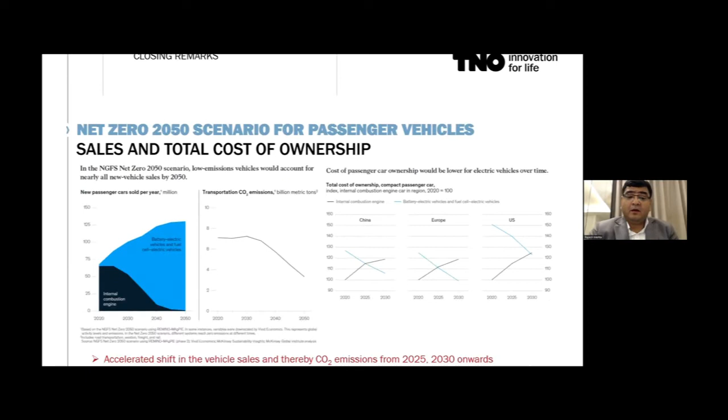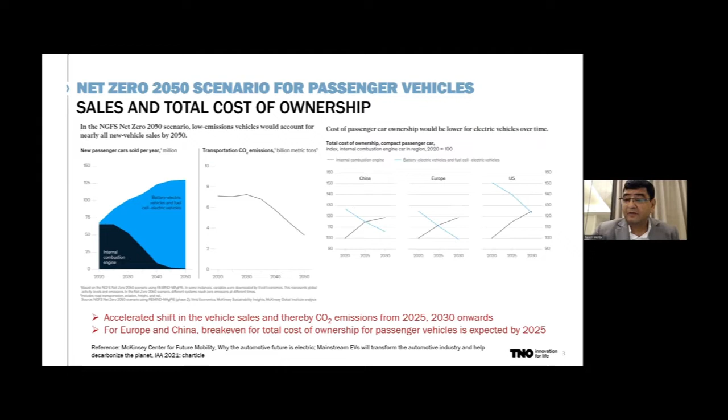Now, if you look at the net zero 2050 scenario for passenger vehicles, McKinsey gave a forecast that there is an accelerated shift in vehicle sales and thereby reduction in CO2 emissions from 2025 to 2030 onwards, shown by the sharper curve on the left side chart. For Europe and China, there will be a breakeven for the total cost of ownership for passenger vehicles coming up in the 2025 onwards timeframe for these two major economies, helping move towards the net zero scenario for the industry. The US will probably hit breakeven later, by around 2030.

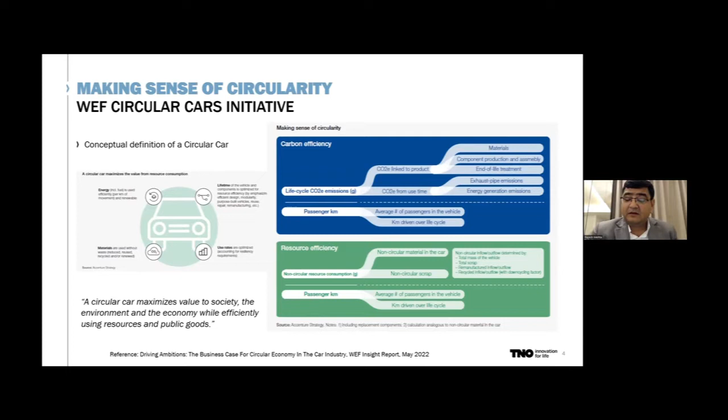Now, how do we make sense of circularity? The World Economic Forum developed a concept through its Circular Cars Initiative, defining a circular car as one which maximizes value to society, the environment and the economy, while efficiently using resources and public goods. This conceptual definition is based on four primary principles: energy, materials, lifetime, and use rates, optimized by maximizing carbon efficiency and resource efficiency throughout the product lifecycle.

This initiative also emphasizes how we can proceed at different levels of circularity. Currently, from an owner-use-and-dispose concept at level 0, the Circular Cars Initiative highlights moving to net positivity in the system, and by 2040 onwards, making a positive contribution to society. This entire transformation pathway is structured at four different levels: product decarbonization, material circularity, lifetime optimization, and utilization optimization, thereby enabling carbon efficiency and resource efficiency.

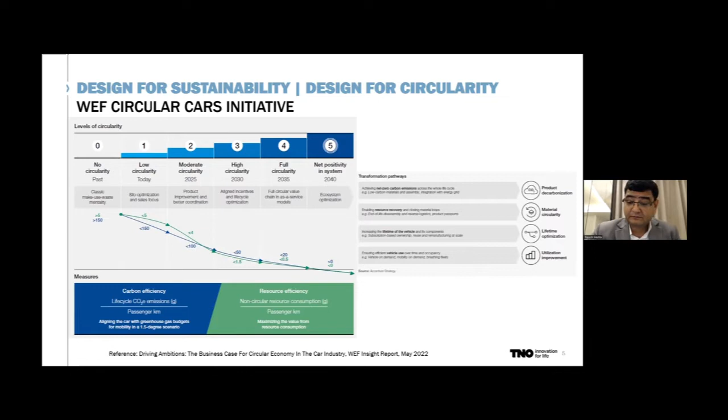This transformation pathway, as envisioned by the World Economic Forum, covers four different levels. The first is product decarbonization, with different examples proposed by the Circular Cars Initiative at levels 1 through 5. The second pathway is material circularity, with different concepts proposed here. The third, as I said, is lifetime optimization, and the fourth is utilization improvement.

All the different pathways finally converge at level 5, which is the development of a mobility ecosystem that makes a positive impact on the environment with net zero carbon emissions. So we are moving away from individual car-based transport to a mobility ecosystem at level 5. That's how the World Economic Forum's Circular Cars Initiative envisions the path forward for the industry.

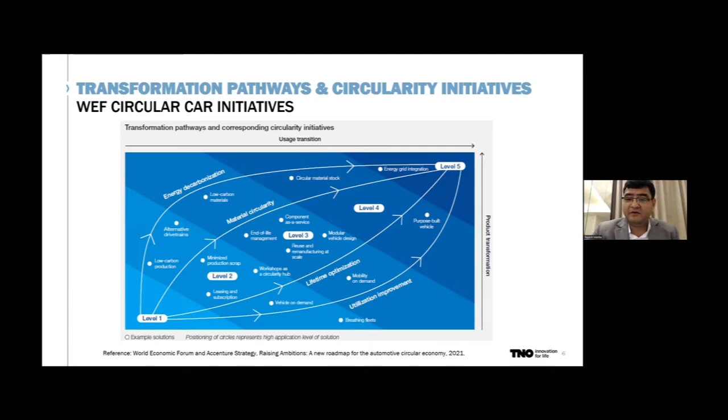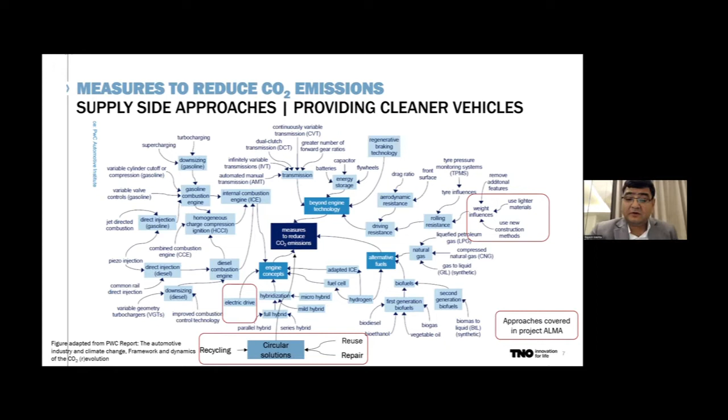Some of these approaches have been touched upon by our project ALMA, a Horizon 2020 program. We have explored weight reduction options, engine concepts moving from ICE, internal combustion engine, to battery electric vehicles with electric drive, and also incorporating concepts such as reuse, repair, and recycling to offer circular economy solutions in the product development phase.

Now, what does Project ALMA aim to achieve? The goal is to design, validate, and build a lightweight prototype, including the body in white, closures, and the modular platform systems. This prototype should fall within an acceptable range of the functional, safety, and manufacturing requirements of the OEMs.

The project is a collaborative effort among 9 partners, as mentioned here. CTAG and Ford are driving this program, and other partners are contributing to this overall effort. The program is a 3-year project with a total EU funding of 5.2 million euros.

Now, within this project, TNO developed a tool called BEVSIM, which is short for Battery Electric Vehicle Sustainability Impact Assessment Model. It's a web-based tool on Diamonds, TNO's proprietary platform, built on R Shiny programming suite, and has best-in-class databases on lifecycle impacts.

The tool offers users the ability to compare design alternatives. To make a significant impact on improving sustainability performance, you have to think through the design elements of a product. That's why the emphasis of this tool is to allow designers and engineers to compare alternatives early in the design cycle. It's designed for non-LCA experts, enabling early sustainability evaluations, faster LCA evaluations, and scenario evaluations, even for non-sustainability experts.

The tool is customizable. You can model a full car, a subsystem, or a part for lifecycle impact assessments, lifecycle costing, or circularity analysis of your material or products. And of course there is the possibility to include customer and user-specific data sets in this web-based tool.

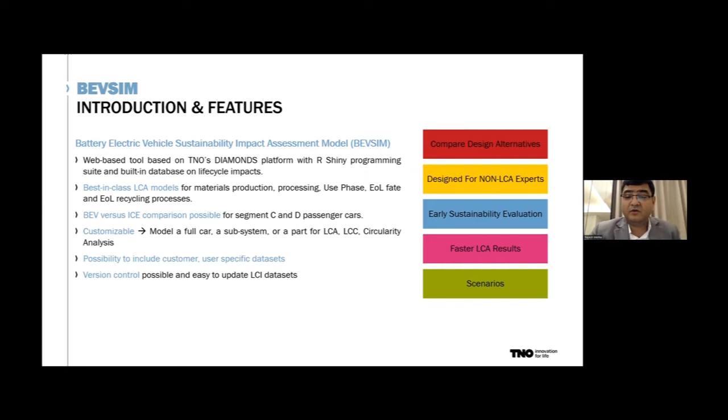To make sure sufficient confidentiality is maintained and version control aspects are taken care of, the tool handles this through the web-based initiative, where a user ID and password is provided, with separate organization-based or individual-based login credentials.

Now, why do we need another sustainability assessment tool? Here is the value proposition for the BEVSIM tool. As I said, it allows early screening of design alternatives in the research and development phase, offering significant savings in time and effort for performing LCA studies compared to full suite LCA software such as SimaPro or GaBi.

It offers consistency across LCA studies for automotive applications because your entire data set is available on a single platform. It's an application and sector-specific tool with a simpler design, focusing on key engineering and design elements, which at times get missed by LCA experts when moving from one sectoral LCA study to another. It also offers lower total cost of ownership compared to full suite LCA software that requires in-house LCA experts or services of LCA consulting companies.

Now, BEVSIM actually targets different user segments. At the organization level, you have automotive manufacturers, tier 1 or 2 suppliers, material manufacturers, service companies, and of course research institutes and universities who can utilize the services of BEVSIM.

The target user segments are automotive engineers, product developers, and product designers. Sustainability and LCA experts can also use this tool for doing LCA studies themselves, and academia and LCA consultants are also key users of this tool.

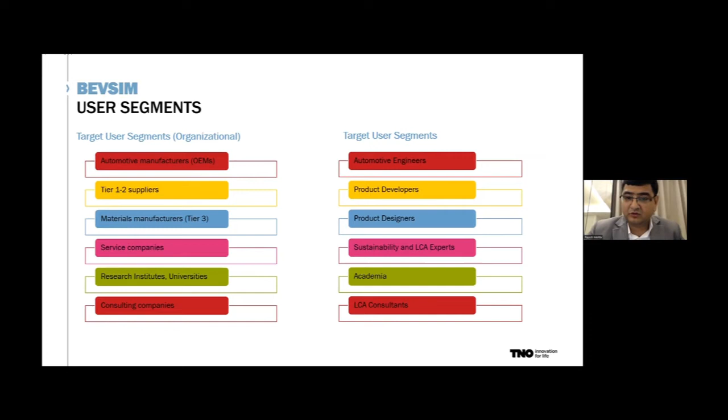Now, what are the capabilities of the tool? It's a single tool to do all three types of assessments: environmental through LCA, economic through life cycle costing, and circularity through circularity assessment. It allows measurement of impacts through lightweighting, comparing different design alternatives, or choice of materials.

It covers choice of subsystems, implications of the use phase, and the geography where your product is going to be used, be it in Europe, China, or India, and choice of different recycling options at the end of the vehicle life, as well as various futuristic scenarios such as grid mixes for 2050 or 2030 in different geographies.

Now, BEVSIM covers the entire life cycle phases of the automotive parts or the entire car, right from raw material production to processing and part production. Assembly operations, which are critical and often get missed in LCA studies, are well captured in this tool.

The use phase aspect of different cars: at present, we have passenger vehicles captured, but we plan to cover commercial vehicles also in the BEVSIM tool. Different end-of-life scenarios go beyond traditional incineration, landfill, and recycle options, all the way to capturing recycling options for plastics and composites, from mechanical to pyrolysis and solvolysis.

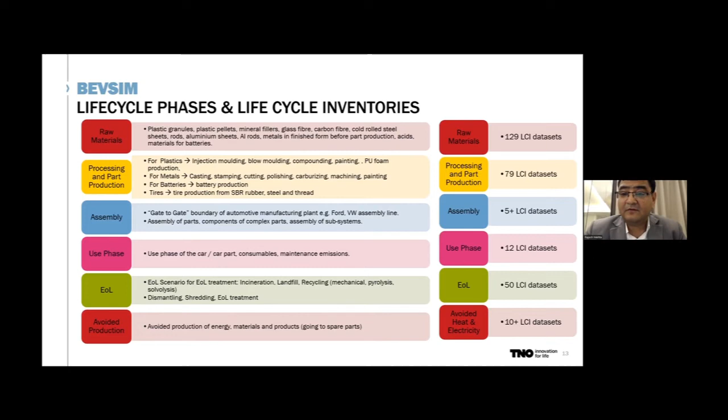An important aspect is dismantling, shredding, and end-of-life treatment options, which also often get missed in traditional LCA studies and remain a gap. The last one is the avoided production aspects that are well captured. On the right side, you see the number of life cycle inventory data sets available for doing LCA analysis within the BEVSIM tool.

Now, here is a simple snapshot of a 7-step process to do a sustainability evaluation using BEVSIM tool. First, a user is asked to select a user design of a new car, a subsystem, or a part. This could be a new user design or a design which already exists in the BEVSIM database.

The second step is to edit the user design to take care of any design alternatives, be it in materials or processing stages, followed by selection of the reference design. What is your market incumbent at this point in time from where you would like to improve upon? This could be a single reference design or multiple reference designs.

BEVSIM gives that opportunity. The fourth step is to do a selection of the use phase method, be it for the internal combustion engine or for battery electric vehicles. And the fifth step is selection of the right end-of-life scenarios.

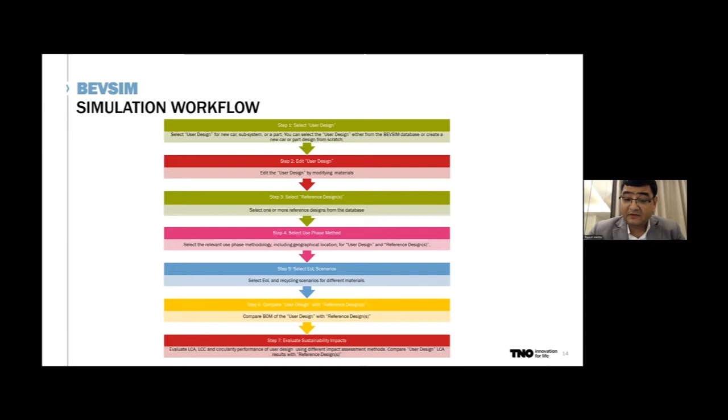Which geographic area you are going to use the vehicle in, what kind of recycling infrastructure exists there, and what kind of recycling options are really possible for your product or part, such as for steel, plastics, or composites. Those options have to be selected correctly, and BEVSIM gives that guidance in the tool, followed by the last two steps where you compare the user design with the reference designs and evaluate the sustainability impacts.

Now, quickly, here is a snapshot of the steps available in BEVSIM. First, select and edit the user design. As I said, one can also create a new user design, and there is a database of traditional or typical user designs available, which the user can modify based on their requirement.

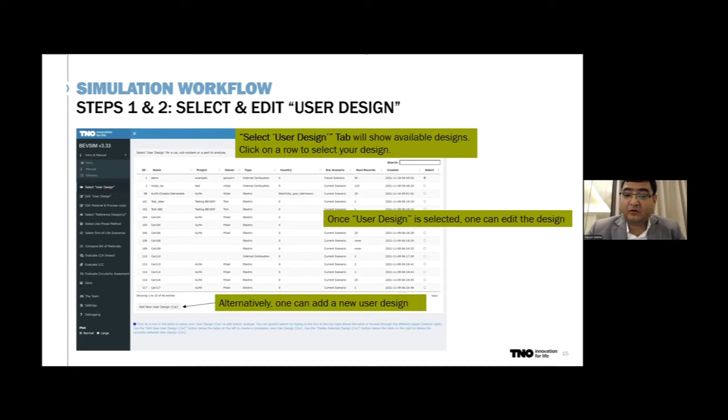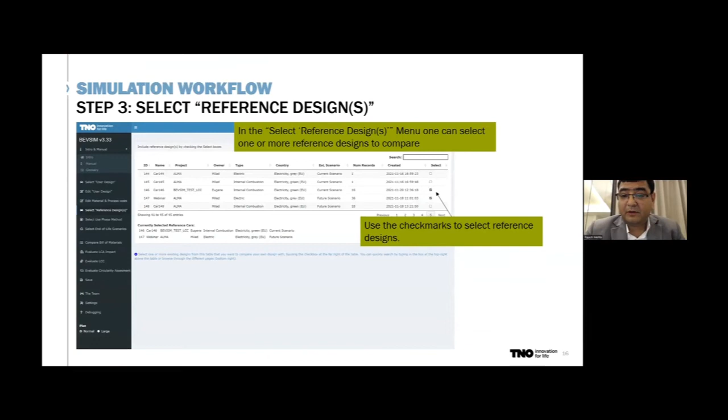Now, step 3 is to select the references for the reference design. It could be one or multiple reference designs to benchmark your product. Step 4, as I explained, is selection of the right use phase method and end-of-life scenarios. BEVSIM gives that flexibility and options to consider different recycling options such as mechanical recycling, pyrolysis, and solvolysis.

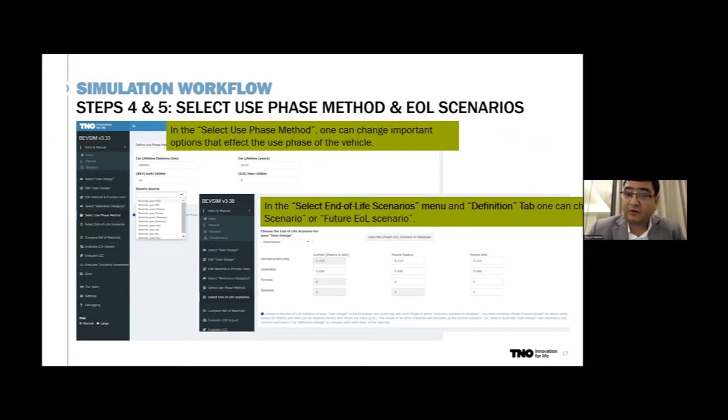This solution you will see is missing because from the ALMA project, we figured out it's practically not possible to apply this solution in certain composite stages, and that's why you do not see it as an option here. That was one of the interesting research findings of the ALMA project.

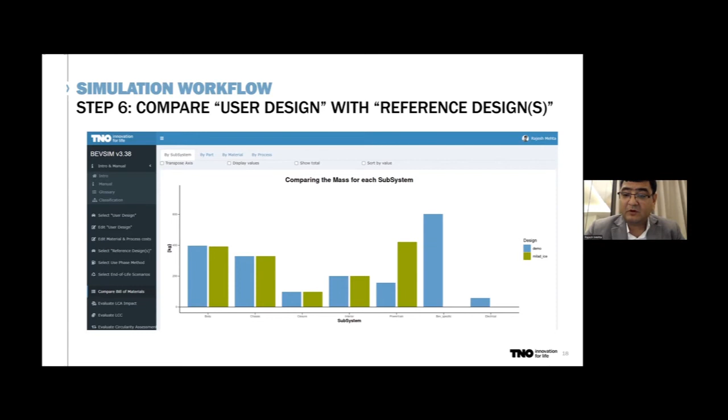Finally, you can compare the user design with the reference design. Here is a sample snapshot where the mass of different subsystems are compared for a demo car with a reference car.

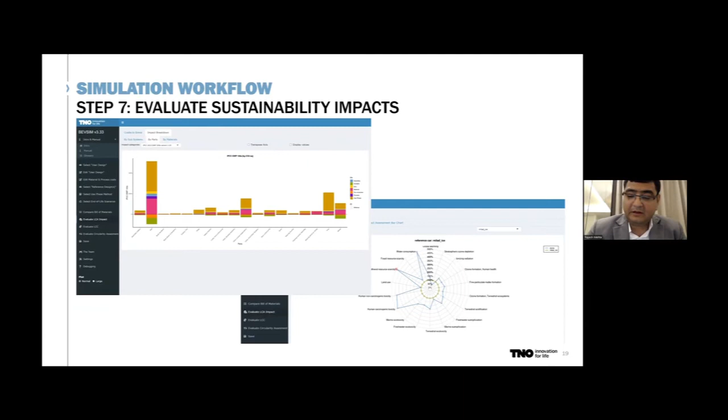And you can, of course, do a sustainability impact evaluation. We offer multiple impact categories, starting from IPCC global warming potential, all the way to ReCiPe midpoint. These could be investigated at the full car level, or one can go into a subsystem level, a part level, or even the material level to make improvements in the product design cycle.

Lastly, material circularity is evaluated by BEVSIM in step 7. Here is a sample snapshot of material circularity measured by MCI, the Material Circularity Indicator, developed by the Ellen MacArthur Foundation and Granta Design. It's on a scale of 0 to 1 to evaluate circularity performance of different material flows going into different product streams.

In this example, you would see that certain products have indeed lower circularity assessment or MCI scores, and there is significant room for improvement on circularity performance of these materials, including plastics, polyamide, and of course the tire materials as well.

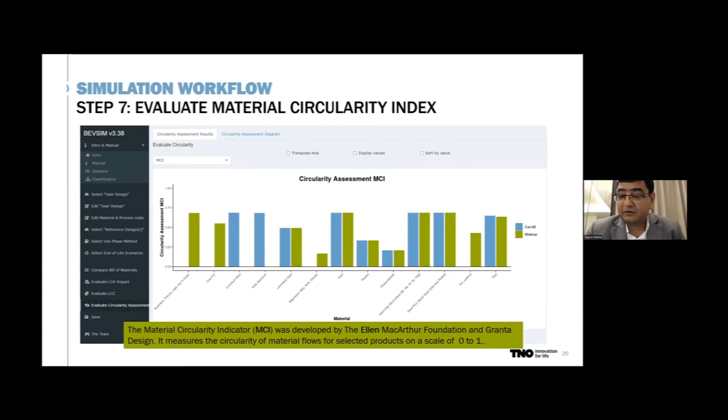Now, how do we prove that BEVSIM is indeed ready for commercial use? We did several alpha tests, and here is an example of alpha test 1, where we successfully tested the tool using a use case built on a subsystem, which was a chassis for a BEV vehicle of a passenger car.

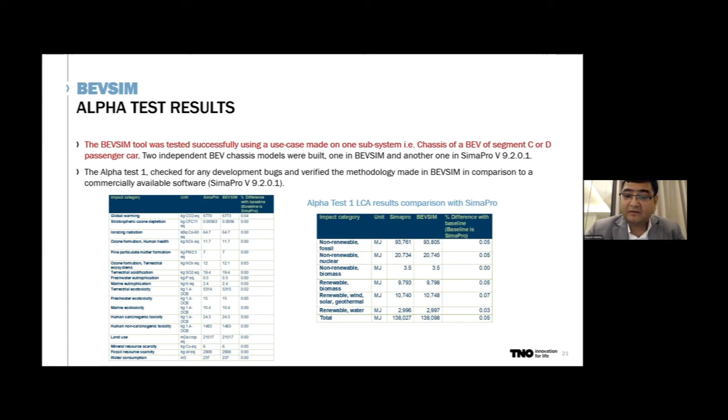Two independent BEV chassis models were built, one in BEVSIM and another in a commercial software called SimaPro. We evaluated and showcased that the percentage differences in the two analyses, at the overall level as well as at different life cycle phase levels or material levels, were insignificant, less than 0.1%.

Now, what are the next frontiers for automotive emission reduction in this industry? We started with shifting from ICE engines all the way to BEV because the use phase was a big impact category, or life cycle phase, contributing to the overall life cycle emissions of passenger vehicles.

Now, McKinsey's forecast, which is also validated by our internal analysis—I can't comment on that yet because we are in the publication phase of our manuscripts—but our analysis was quite in line with McKinsey's, where the BEVs, when they switch from the existing grid mix to a clean grid mix, material footprint will be a dominant issue to be sorted out.

Now, material emissions are the next frontier if you have to move to the net zero scenario by 2050 or 2045.

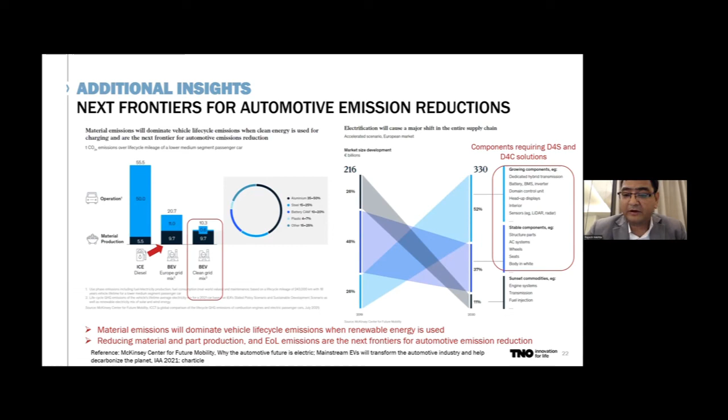And if you look at the right side, we will have to focus on certain components for design for sustainability and design for circularity solutions, which are coming in from the growing shift from ICE to battery electric vehicles, because the current supply chain will not remain the same due to the big reorientation going on in the automotive sector as platforms have changed. And sunset commodities should be avoided to focus on product development.

Now, what is our vision as TNO for the long-term development strategy for application-specific tools? We started off with the ALMA project, where we built the BEVSIM tool for passenger vehicles in automotive.

And we would like to expand this concept to offer application-specific tools built on common platforms for other sectors such as mass transportation, aviation, and building and infrastructure as we go forward in time. The emphasis is that these tools will be built on a common platform with the same, best-in-class databases.

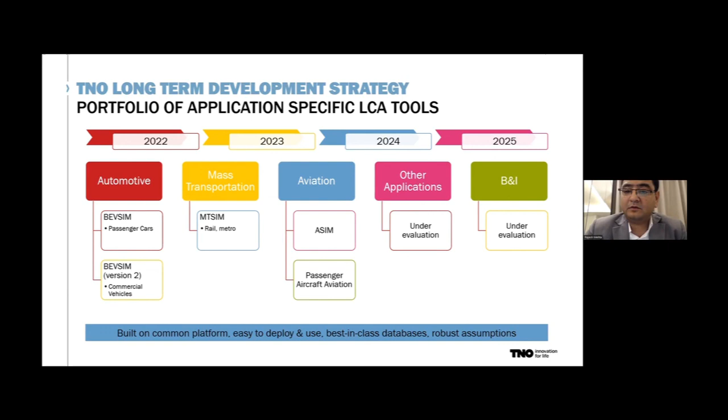Easy to deploy and use by non-sustainability experts. The traditional users, as I said, will be product designers and engineers, and also built on robust assumptions. What we have done is hard-coded major assumptions as sustainability experts into the BEVSIM tool, so that non-sustainability experts are not challenged by making assumptions which are not relevant for their use case or their LCA studies.

Now, closing remarks. There is an accelerated shift, as I mentioned, in vehicle sales, especially for battery electric vehicles, and thereby there will be accelerated reduction in CO2 emissions starting from 2025, 2030 onwards in Europe.

And reaching net zero will also mean decarbonization of the EV production and end-of-life phases, because that's the next frontier. Design for sustainability and design for circularity solutions will become critical. Lightweighting will be important, but whether those lightweight products are recyclable is an important aspect, given the increased use of composite materials or multi-material solutions in vehicle systems.

BEVSIM is an application-specific tool which can be leveraged to assess the environmental, circularity, and economic impacts of passenger vehicles. We encourage different partners, ecosystem players, and sustainability experts to try out this new tool, offered by TNO, which has significant capabilities and best-in-class databases to offer lower total cost of ownership for users compared to full suite LCA software.

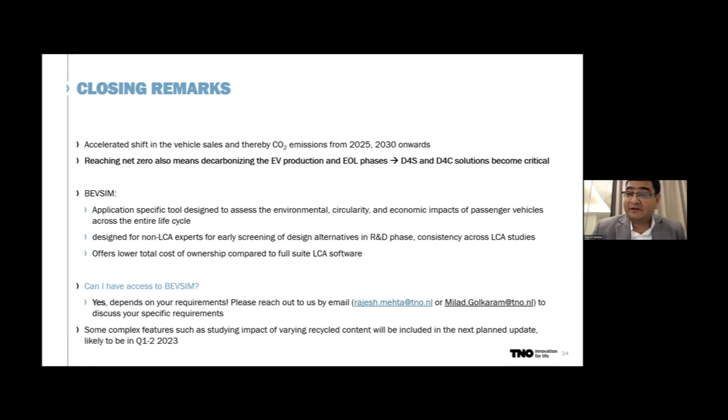Now, some complex features will be developed in the next phase of BEVSIM development. I would say stay tuned for the next update of the BEVSIM tool by early 2023. Thank you very much for listening.